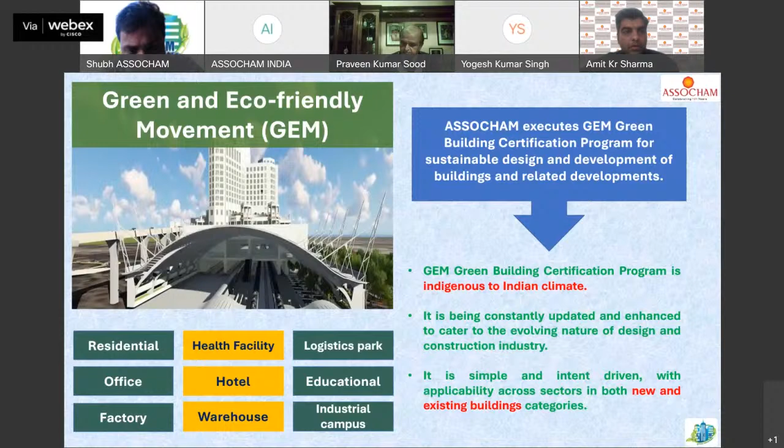For example, ECBC, Energy Conservation Building Code, by BEE, Bureau of Energy Efficiency India, right? And NBC 2016. So here we are talking about it.

When we start this journey, first we discuss the Indian power sector. Talking about the Indian power sector, the total installed capacity in India as of 31st March 2021 was around 382 gigawatts for the entire country.

Coal is 53%, hydro is 12%, nuclear is 2%, diesel engine is 0.6%, and lignite and gas energy is 6% and 2%.

If you see the renewable energy part, in 2021 solar power and wind power will be coming in the same scale, around 42% of energy generation is done by these two technologies.

If you're talking about the potential of India, India has more than 1,000 gigawatt of potential. Especially for solar energy, India has more than 750 gigawatt of potential. For wind energy, it has around 300 gigawatt. For bioenergy, the potential is 25 gigawatt. And for small hydro projects, we have a potential of more than 50 gigawatt for the entire country.

This means that if we're talking about renewable energy, and if we only depend on renewable energy, we have enough energy if we can generate the required amount with the help of renewable energy.

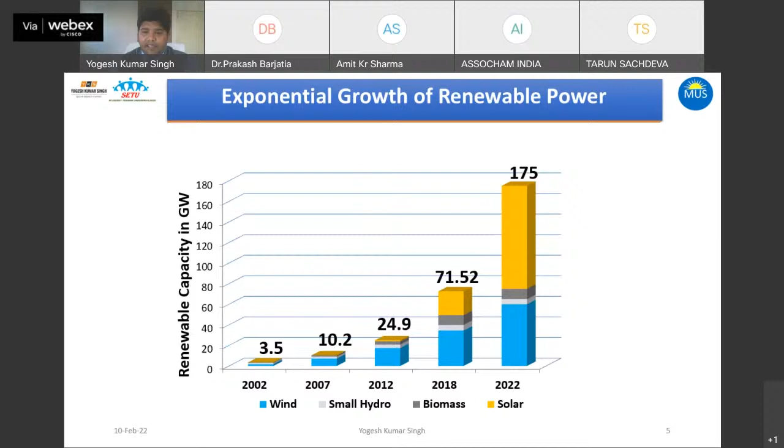Now if you see the growth of renewable energy in India, in 2002 only 3.5 gigawatt of total installation was happening in India. When we see in 2018, we have already achieved around 71.52 gigawatt for the entire country, and the MNRE has seen the major role in achieving this target. We are thinking we will achieve around 175 gigawatt by 2022, and our next target for 2030 is more than 500 gigawatt. Our government is working in the same way.

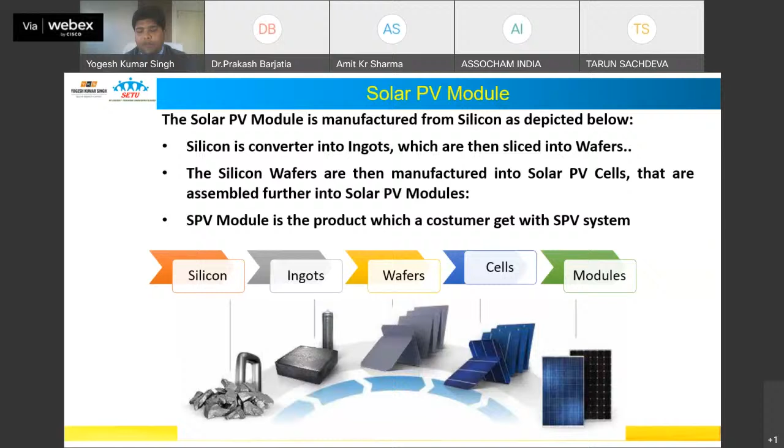Now when we're talking about the solar module, the basic material for the module is silicon material. Then we make the ingots, then we make the wafers, then we make the cell, and then we make the module. So the major technologies of solar PV technology in India are crystalline technology and thin film technology.

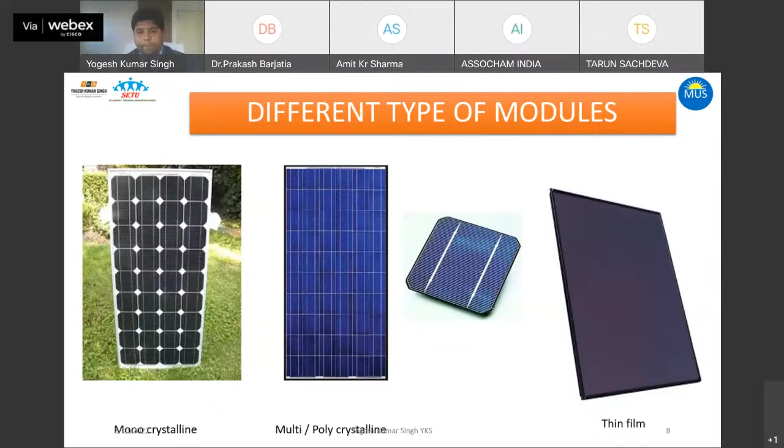When we're talking about crystalline technology, we have monocrystalline and polycrystalline technology. And when we're talking about thin film, we have different types of technology like CdTe, CIGS, amorphous silicon, micromorph, triple tandem. These are the technologies available in India, but these technologies also depend on the climatic zone, the weather condition, and also on the temperature and radiation behavior from the Indian side.

Apart from that, if you see the last couple of years, a lot of revolution is happening in renewable energy. Now we are getting flexible solar panels also available in the market, and with the help of that we can utilize it in a bigger way. With the help of that, we do not require any glass or any membrane on the module. So we will just use the flexible module, and with the help of that we can make any such type of design.

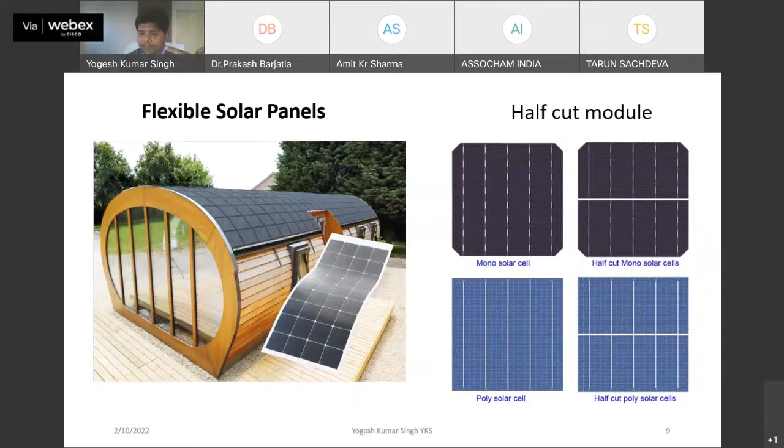Apart from that, the new revolution is happening with the half-cut module cell. This module is basically an advantage for the shading part of the thing, because a lot of times we see that shading happens on the module, so the module will not generate the optimum amount of energy. So the industry has gone to the half-cut module, and with the help of this module we can generate more energy in the shading part as compared to the normal module.

Apart from that, in the last couple of years, mono PERC technology has come to play a very big role in India. This module is the Passivated Emitter Rear Contact cell. If you see the normal module, you can find that there is a standard cell, but what is the difference with the PERC cell? In a PERC cell, we use the passivated emitter rear contact cell, and with the help of silicon nitride for the capping layer, we can generate the maximum energy as compared to the standard module. So nowadays a lot of projects are going to the mono PERC kind of technology.

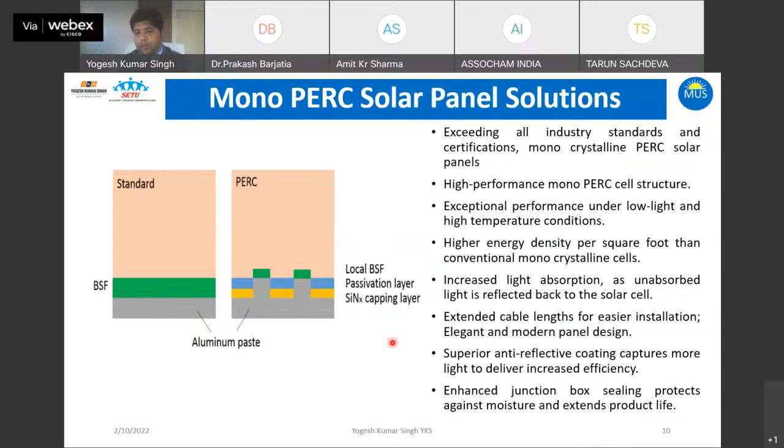Apart from that, in the industry, in the last 2 to 3 years, the bifacial module has come into a very big role. The advantage of the bifacial module, from the study side, is that if you're using a bifacial module, we can produce more than 11% more energy as compared to the normal module. And if we're using a tracking system, we can generate more than 27% more energy as compared to the normal module.

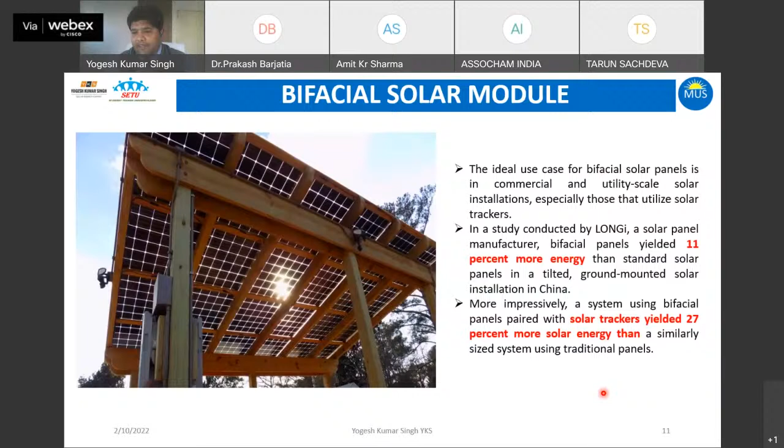If we require high energy, high energy perspective, we can use bifacial modules, and with the help of that we can generate maximum energy as compared to normal modules. Now, if you're talking about the PV system, how does it work?

The major PV components are the PV module and the structure. Structure quality is also very important for the design, because the lifetime or reliability of the solar module is around 25 years, so your module warranty will be given for 25 years. So whatever structure you are using must also sustain for 25 years, which is why the foundation is very important.

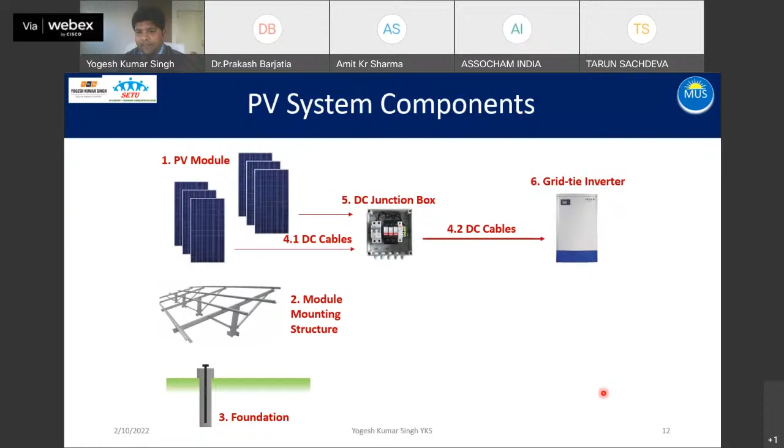Apart from that, cabling selection and cabling sizing is also important for proper generation. Then we use the inverter, and finally we use the communication cable and the metering console.

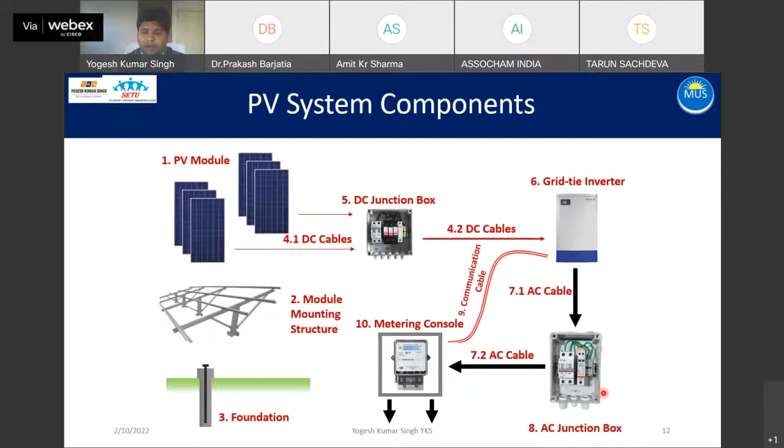These are the different types of components, and we see that a lot of failures are coming to these components in real time. So I'm just focusing on some problems - what are the major problems coming to the module when we install it in the field? Because when you install the module, operation and maintenance is lacking in India, and we did not achieve the maximum amount of energy as compared to the installation.

So we just focus on the major failures coming to the solar module. When you're talking about failure, there are basically three types of failure coming in the module: infant failure, midlife failure, and wear-out failure.

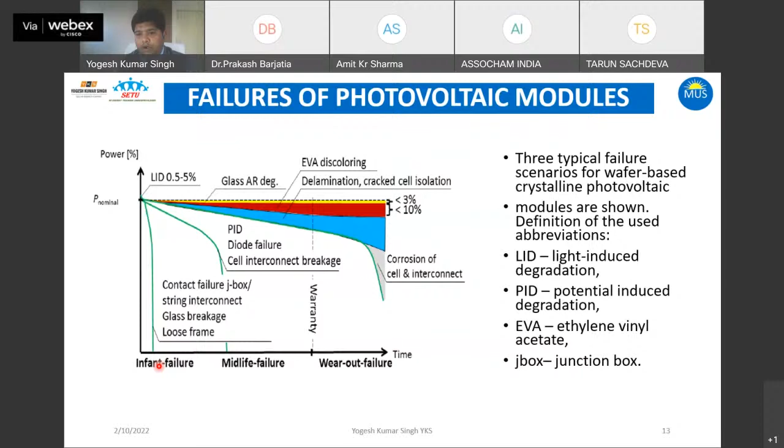Some degradation happens due to LID, light induced degradation. Then there's glass degradation, EVA discoloration, delamination, cell corrosion, the PID effect - potential induced degradation - and diode failure conditions. These types of failures come in the market, and due to this our module will not sustain for 25 years.

So what is the major observation we find in the module? If you go to the IEC, the International Electrotechnical Commission standards IEC 61215 and 61646, from there we can find out the different types of failures coming to a module.

If you're talking about the front side, in a module there is bubbling, delamination, yellowing and browning. Otherwise there's broken cell, cracked cell, discoloration, and anti-reflection issues. If you're talking about the cell metallization, there is some oxidization happening there.

If you're talking about the frame side, sometimes the frame will be bent, broken, scratched, and misaligned in some corners. The major failure comes to the back side of the module, where we use the Tedlar or back sheet - there's major failure like delamination, bubbles, yellowing, scratches and burn marks.

When we're talking about the junction box, it also fails due to oxidation, corrosion and loose connections. The final point is wire connection, because if you don't use proper wiring connections in your solar power plant, sometimes your solar power plant can catch fire, which will also cause failure of the plant. So whenever we design a solar power plant, proper cable selection and proper rating of the wiring connection is always required for the system.

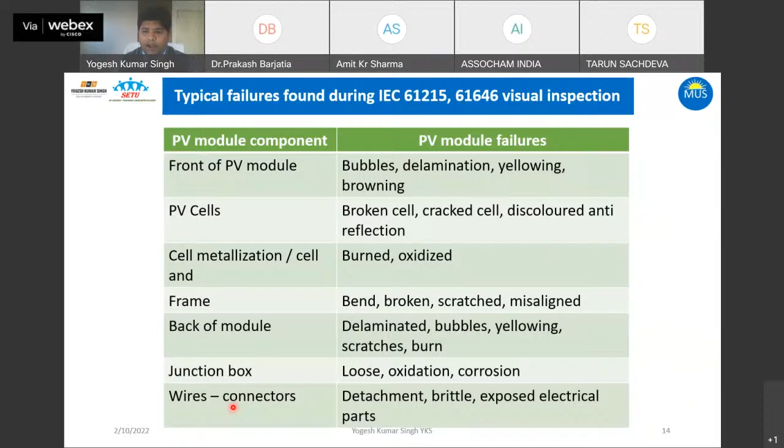This is another example of a module like that - this is a thin film module, and if you clamp the module too hard, you can see it breaking at the corner, and it is also not generating the maximum amount of energy.

So whenever you install to the system, you will also take care about this type of flexibility. Otherwise, you will be facing some issue from your solar module.

This is the burn mark from the back side. If you did not use good quality of the module or the cell, and if you did not use good quality of the back sheet, you can also find out some burn mark on the back sheet, and it will be damaging your module.

The next thing is the burn mark on the front side. Sometimes in the field, we can see a burn mark appearing on the front side, and after a few duration, your module will be degraded, and it will not be operating at an optimum amount of energy.

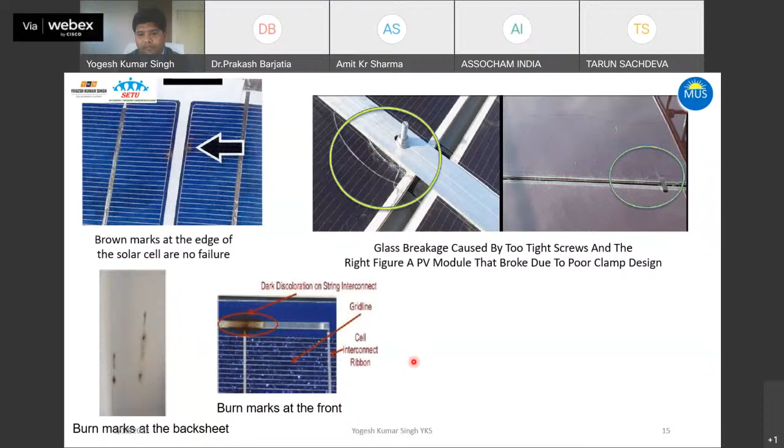Another issue that can occur in a module is delamination. If there is some oxidation, or if the EVA is not proper, the delamination issue will come there.

Another major problem is the snail trail. This type of thing will become visible in a module, and initially there is only a snail trail, but later on the cell will crack down.

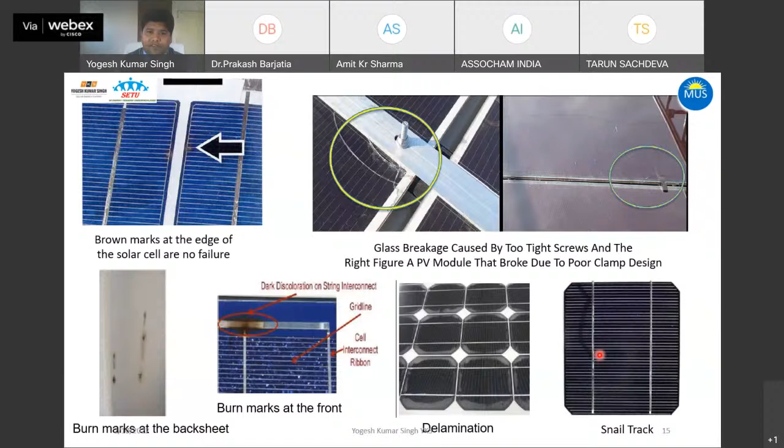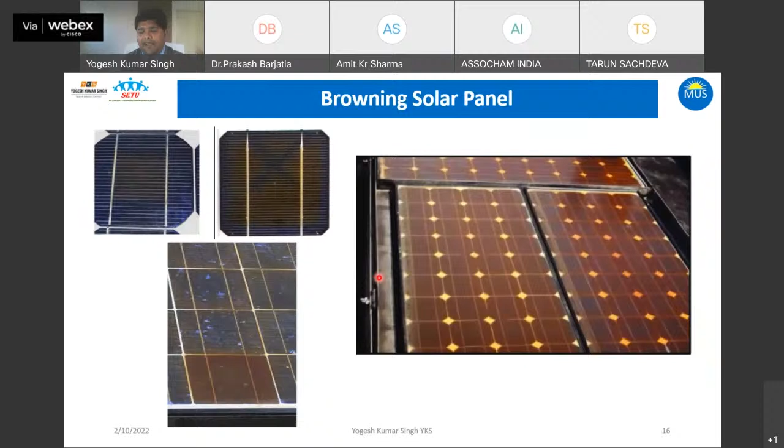How can you find out the browning of the solar module? And if the browning occurs, it will definitely also be affecting the total energy generation of the module.

Now this is a thermography kind of thing. With the help of thermography, we will cross-check our solar module if there is some problem in the module. So we can see this with the help of thermography.

Another methodology is electroluminescence images. With the normal eye, you can see that your module is okay, but with the help of electroluminescence images, you can find out if any cell is cracked, so you can easily identify the scenario and this issue.

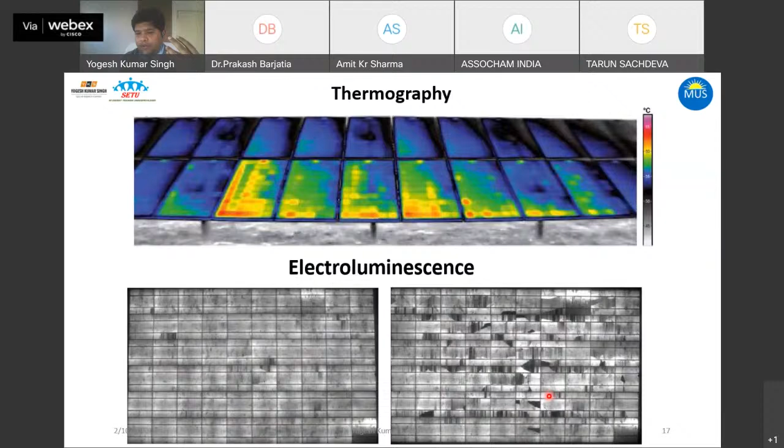So today in the presentation, we will discuss about renewable energy and energy storage. But the first thing is the quality. If you do not use the proper quality of the module or the cell, your storage or reliability will be affected in the system.

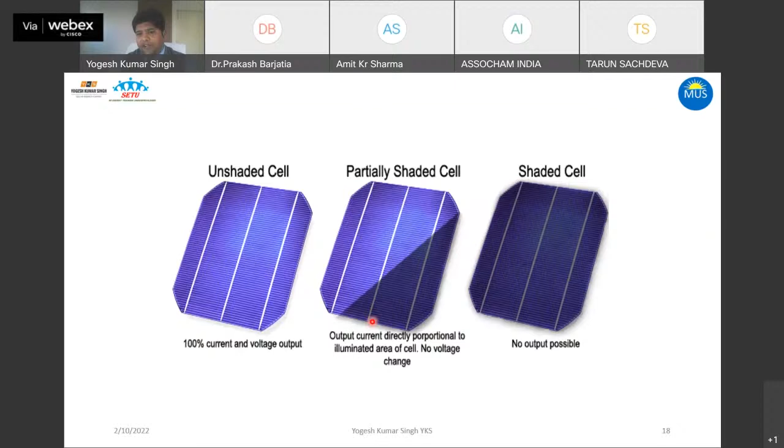The next major thing that affects the module is shading. If there is some partial shading or full shading, your module will not work properly. Another issue is that sometimes this type of shadow falls on a module, and it will not generate the optimum amount of energy.

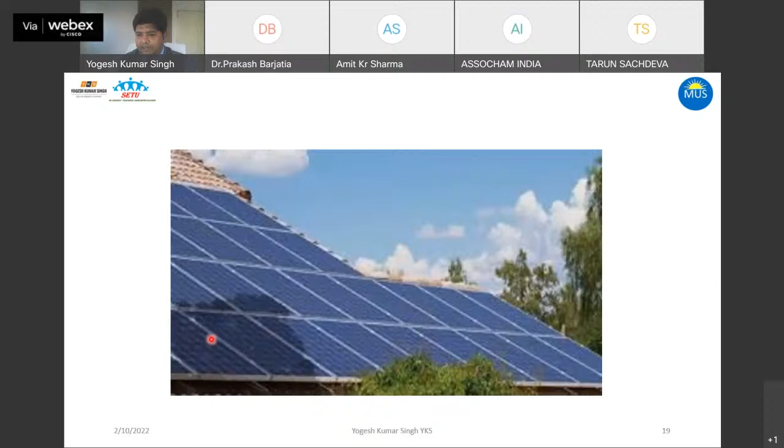And this is the importance of cleaning. A lot of the time bird droppings will accumulate, and if you do not clean your module, after some time it will create a hot spot, and it will damage the cell quality.

Now, the last important thing for good quality generation or data is system monitoring, which is very important for your observation, because without system monitoring, you cannot see what is happening on your module. Whether your system is small scale or large scale, system monitoring is very important. A lot of companies provide this system monitoring aspect.

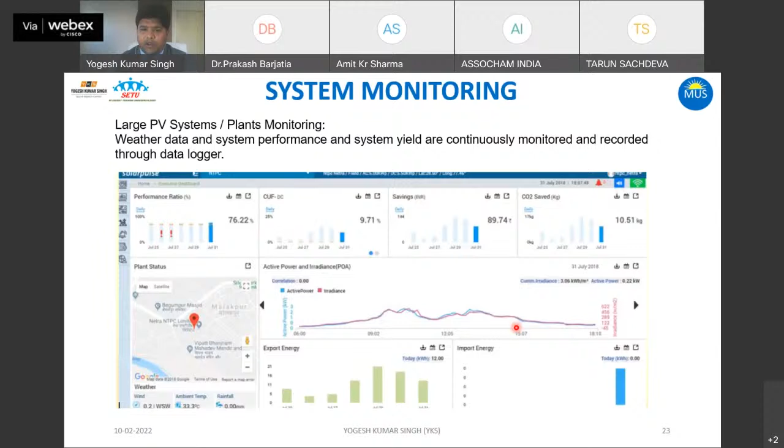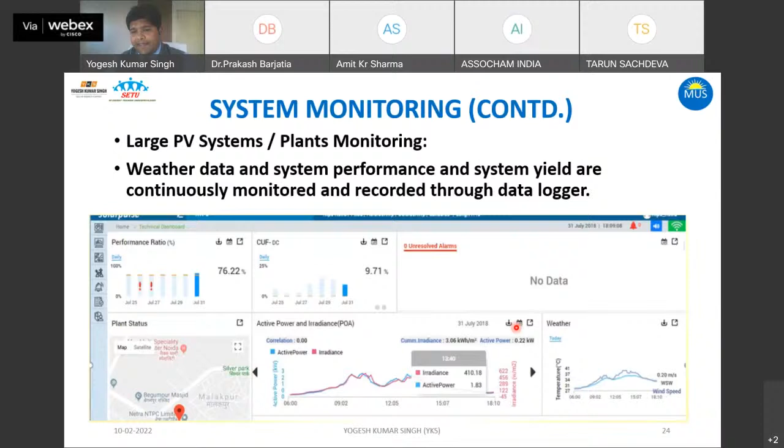From this aspect you can see your module performance, how much your module is performing on a daily basis, and you can also see some issues if your module is not working properly, so you can cross-check the faults. Apart from that, you can also cross-check the energy generation, performance ratio, and capacity utilization factor. So monitoring is a very important aspect for energy generation.

So the last point is operation and maintenance. Once the solar module has been installed, the company generally gives a guarantee for the solar module of more than 20 to 25 years.

Once the installation is done, the second major work becomes operation and maintenance. We have different types of locations, and for every location we have a different strategy for operation and maintenance, because India has 6 different climatic zones, and in each zone the weather condition will be different. Some places have very high dust, some places are very cold, some places have maximum UV exposure. So everywhere operation and maintenance will have its own challenges. We require resource availability and resource allocation, and with that we move to plant ownership and operation.

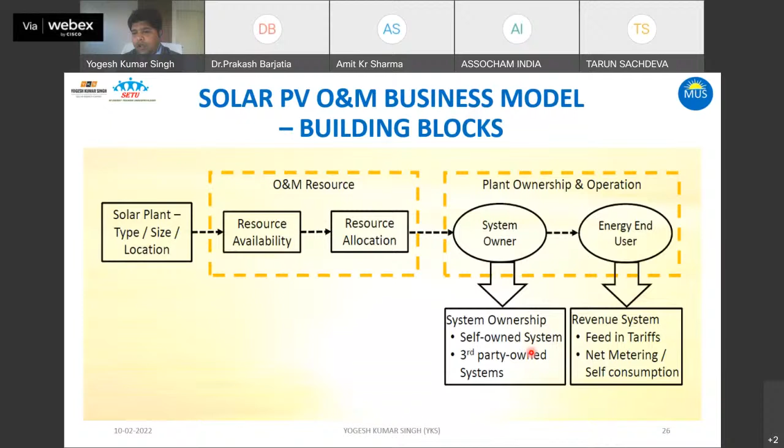If the system owner owns the system themselves, or a third party owns the system, and if it's being used by energy users, we can also do feed-in tariff, net metering, and self-consumption of the system.

So it is a very alarming situation for India. Now we are thinking about how we can achieve this CCC plus rating to reach triple A case. This is a very major concern from the Indian side.

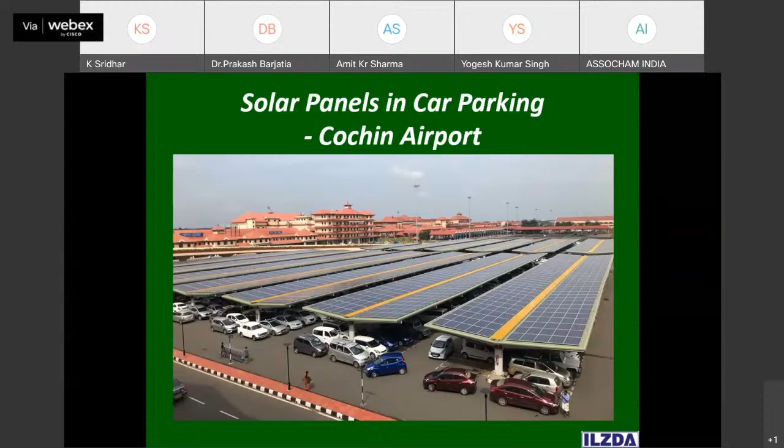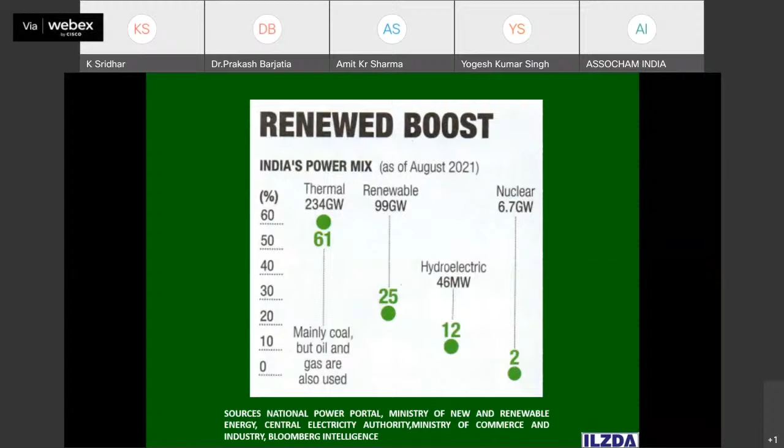So this is where we are mentioning lead acid batteries touches our lives, used everywhere. Railways, yes, we have lead acid batteries. Automotive, yes. Inverter nowadays, each and every household, there is no house without an inverter, I can say. UPS again, then telecom, the street lights, solar energy, and again the electric vehicles, the booming of all three-wheelers, e-rickshaws having lead acid batteries. So really lead acid batteries is essential in our life nowadays.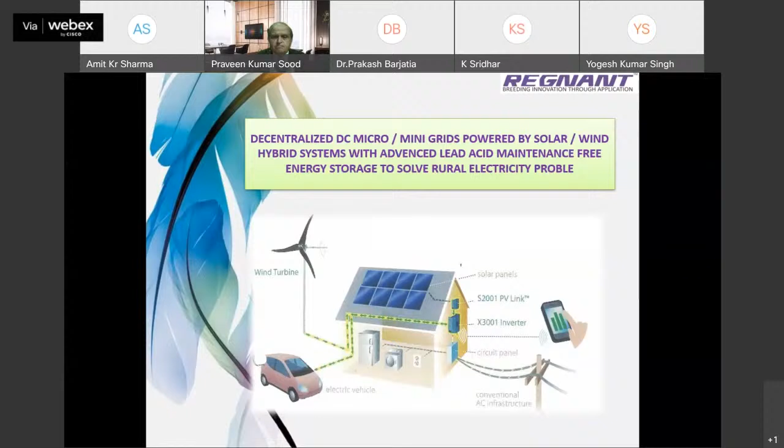Now this is to show that trend - it's not a recent phenomenon. You can see the Advanced Lead Acid Battery Consortium, which I spoke about, has already done pilot projects in the US. In fact, our Ministry of New and Renewable Energy needs to do a lot of learning from the US Department of Energy, the way they run their programs, because there are a lot of shortcomings in our programs, which I have brought to the notice of MNRE officials from time to time. But as usual, the results are very slow.

I'll give you a typical example: the hydrogen economy that we are now pursuing with so much aggressiveness - I had been interacting and telling them since 2010 and 2011 to do this on a major scale, which they are going to do now. So this shows that India is always missing the bus. Just like Yogesh, my colleague, said about solar modules, we talk about Make in India, but where are we? Where is the quality of our manufacturers in terms of global ratings? This is where the real problem lies.

So the thing is, if we want to be a world leader, we need to invest and change our mindsets.

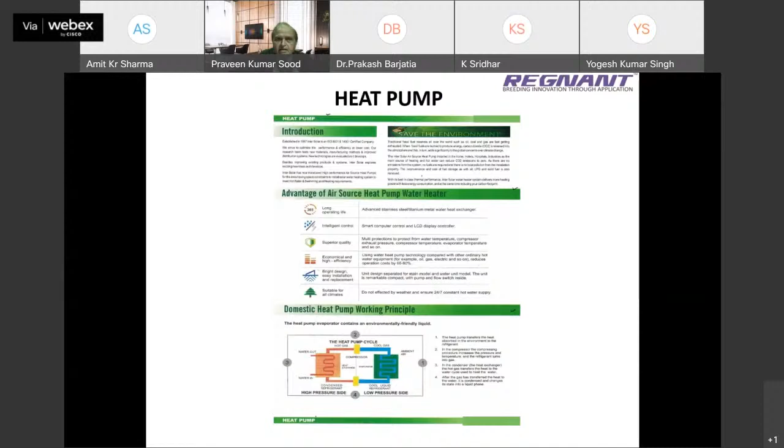Another thing which India has not really encashed upon is a heat pump. In solar, we have got two types of systems. One is called photovoltaics, which you hear so much about but very few people understand and implement. The other is concentrated solar power, which is a passive system. This concentrated solar power system is very cost efficient in many areas and for many different applications.

This works on the heat exchange principle, similar to what an air conditioner does—at one point you take the heat away from the room and throw it outside. In a heat pump, you can actually utilize this waste heat instead of letting it go waste, and use it for various industrial processes.

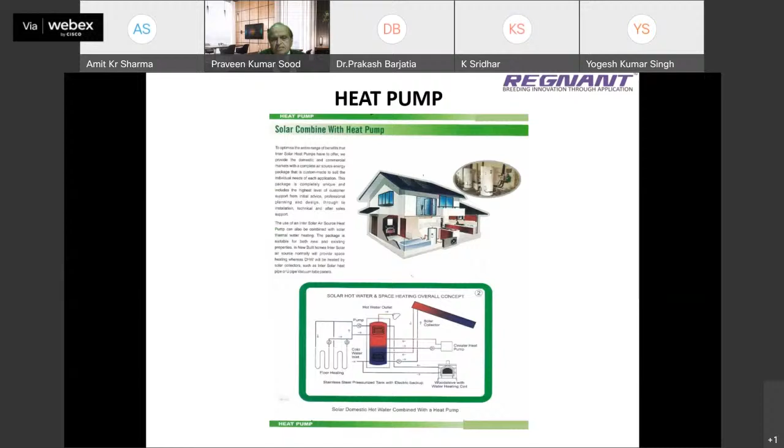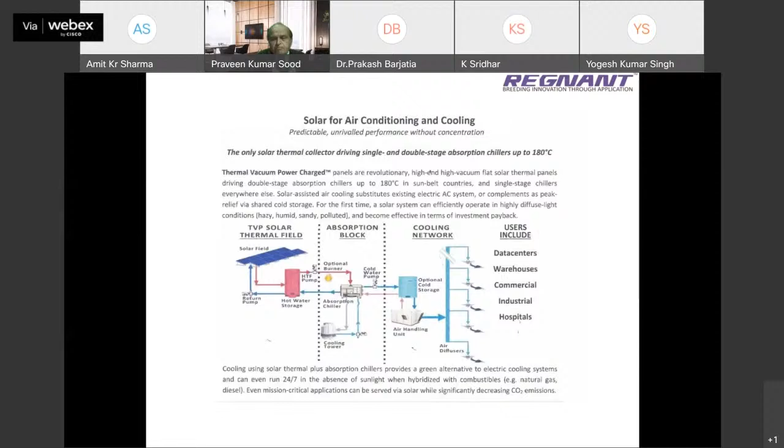These kind of systems are very prevalent in not-so-sun-rich countries, but they still find it very cost economical in Europe. This is solar for air conditioning and cooling of all sizes of buildings, and these have been in operation and making economic sense in many European countries, and also in Australia, New Zealand, and many others. So this is the complete system breakdown for buildings.

This is the industrial process. Solar is also very good for boilers. You can use a solar system with a heat exchanger and substitute or supplement a boiler, so that in case there isn't enough solar energy, you can fall back on the traditional boiler system. But otherwise, so long as you have a lot of solar, it can be stored in the form of heat. Particularly in desert areas, these systems are very popular in Arabic countries and areas with a lot of desert. For example, in our Gujarat it can make a lot of sense, a lot in Madhya Pradesh, in Rajasthan, and many such places.

In today's environment, it's very important for industry to keep their cost of production low. How would you do it? You have to depend upon using as much renewable energy as possible, and this is the way you can compete in the global markets.

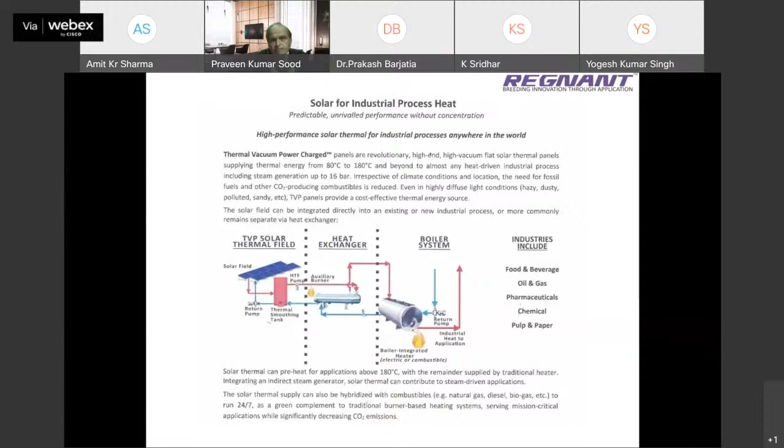These are commercial systems, the kind of big systems that have been in use, made according to MNRE specifications, but somehow I don't know why on a larger scale they have not been adopted. Maybe one reason is that some pilot projects in India were done when the cost of different components was very high. But at today's cost, it makes a lot of sense.

I know of at least two or three large kitchens like the Brahma Kumaris, some Gurdwaras, and other langars where all the cooking is done with these kind of systems.

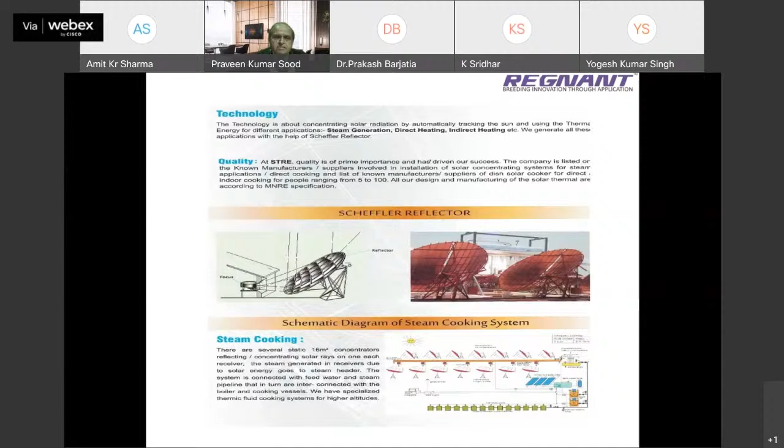This is again the same thing, and the beauty of this system is that on one hand it does heating, and on the other hand it does cooling. So if you want something like a bulk milk chiller, or even desalination and wastewater evaporation, all of these applications can be done using this kind of idea.

Nowadays there's so much talk about electric mobility, and obviously the electric bicycle is the simplest form of using this with proper planning. We are doing planning for smart cities, but I'm more a fan of smart villages, where the real transformation can take place, provided road conditions are good and people have the required skills to assemble these small bicycles at the local level and service them locally.

Otherwise there is a big problem—if you don't have the right skills at the local level, there will be a lot of unemployment. A few days back I was passing through Noida and there was an electric bicycle stand, but to my horror I found beneath it were parked a lot of only electric cars. This is not the kind of system we are looking for. Actually we are looking for bicycles and tricycles, which make more economic sense in a country like India.

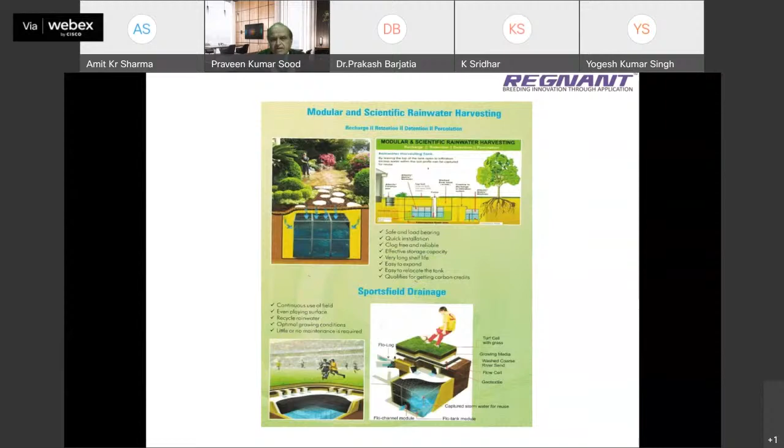Yeah, this rainwater - another thing is very important. Supposing we were to make a solar structure, the roof is all made from solar panels. Solar panels, like Yogesh has said, also need regular cleaning and maintenance, so that water need not be wasted.

All of that water as part of the structure can be harnessed, and even the regular rainy season water can be harnessed as in a community rainwater harvesting system, because individual rainwater harvesting systems can be more expensive and may not make economic sense for each household. But they can always recharge the groundwater. If you do this kind of rainwater harvesting at a community level at a lower cost, then you can also solve your water problem, which is a big issue, like we have the water problem, air problem, energy problem, and waste management also.

Next, please. Next one, please, I think our time is running out. Keep on moving. Amit, any problem not moving? You're not able to? Yeah.

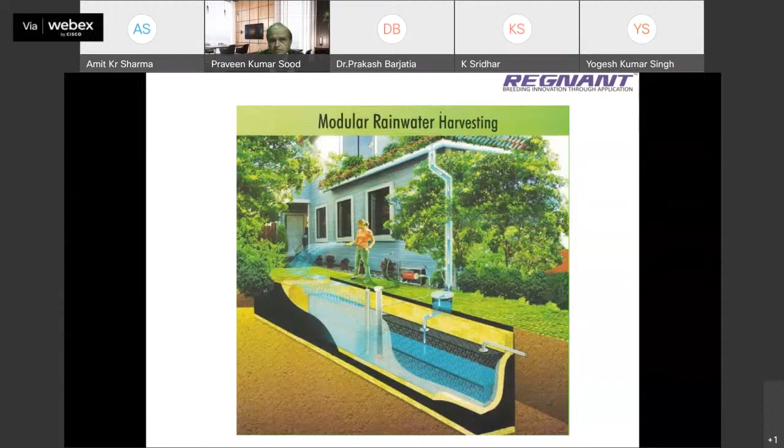So now this is the importance of education, which I emphasized right at the beginning, that we need to reimagine the future of education and start doing things in a different manner than what we have been generally accustomed to doing, because time is running out, technology is available, and courtesy of the COVID crisis, even this work from home and these meetings like what we are doing today - being from an electronics background, I have been telling people about a decade back that why can't some companies make these kind of virtual platforms? But at that time, everybody thought no, this is not the right way, this is not the right time. But now COVID has given us a lesson that there is nothing like a right time.

If you had done your groundwork much earlier, probably a lot of carbon credits you must have achieved. But now this is the time when you have to reimagine education and start doing things differently.